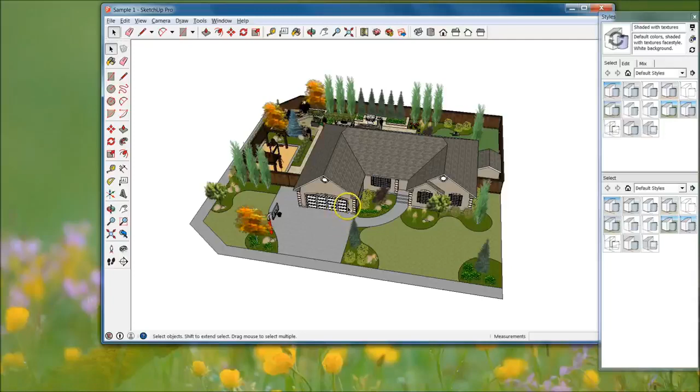I'm super excited about this series because SketchUp and 3D modeling is what I do for a living, so this series is just going to be the best, the greatest that I can put out there.

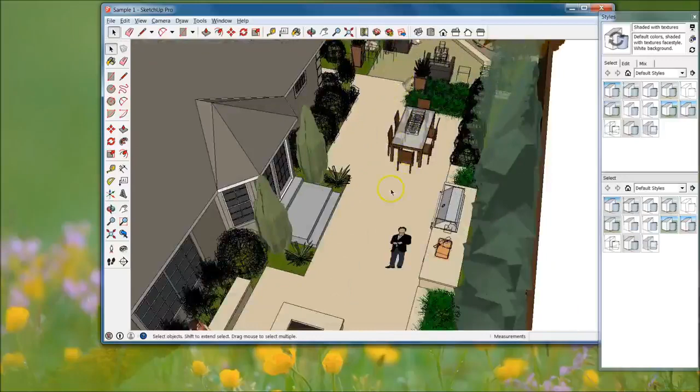First, I'm going to show you some of the things that I've done. These are clients that I've worked for, and I'll show you some examples of what you can do with SketchUp. This is a landscape design, let's zoom in here and pan over a little bit, and just show you some of the things you can build, like tables and chairs, furniture, all this stuff, just the layout.

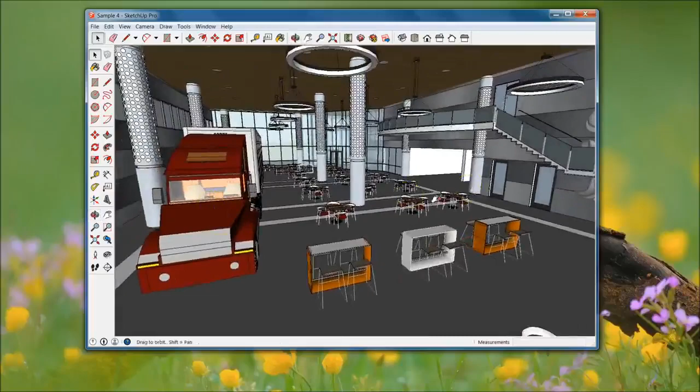I'm going to show you another project, so let's bring that up. This is an interior, actually a project done for CR England and Lisbon Studios. This is their cafeteria area, with a truck inside. Yep, that is Boss. So interior designers will like it a lot.

Also, here's a kitchen design. I'll pull that up. This is for the same Lisbon Studios.

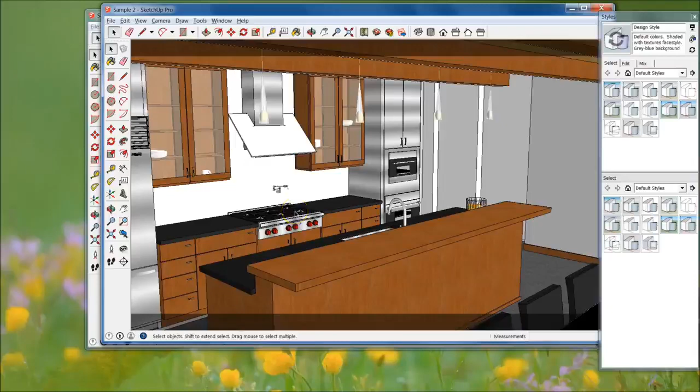SketchUp's great for graphic designers, game designers use it, architects use it, and it's definitely powerful enough to do all of those things. General contractors use it, landscape designers use it. And yes, it could be used for 3D printing and many other things.

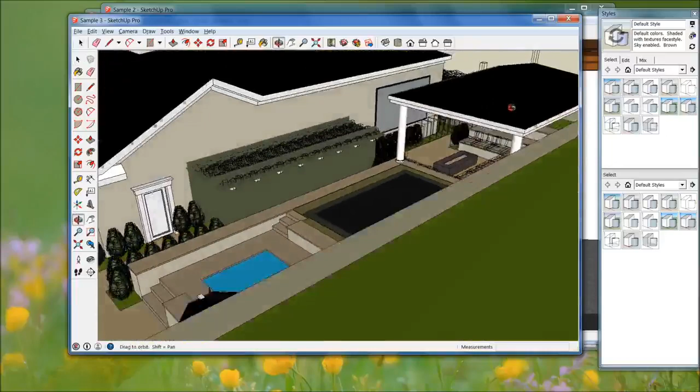So let's show you one last sample. Here's another landscape design right here. There's a pool, zoom in, hot tub, pizza oven. This is actually all built, and I'll maybe throw some pictures up. This is an outdoor movie theater.

Alright, so that's just real quickly. I wanted to show you guys what you can do with SketchUp, pretty much everything, anything to do with design. And now we're going to get started with the sample.

This is going to be a project base, so we're actually going to build a shed. That's the first thing we're going to do. So I'm going to go ahead and exit out of those.

If you already have SketchUp downloaded, let's go ahead and open SketchUp. Where did I put my SketchUp file? Not there, I need to open a new one. There we go. So go ahead and hit start using SketchUp. Choose template - it usually will have you choose a template if this is the first time you've launched it. Just do simple template, feet and inches, and then hit start using SketchUp.

Alright, so you should just have the tools right here on the left hand side. If you don't, you can go up to View, then Toolbars, and just do Getting Started and Large Tool Set. I think that's all we have open right now. And I would do Views as well, go ahead and check that, and then you can just go ahead and hit close.

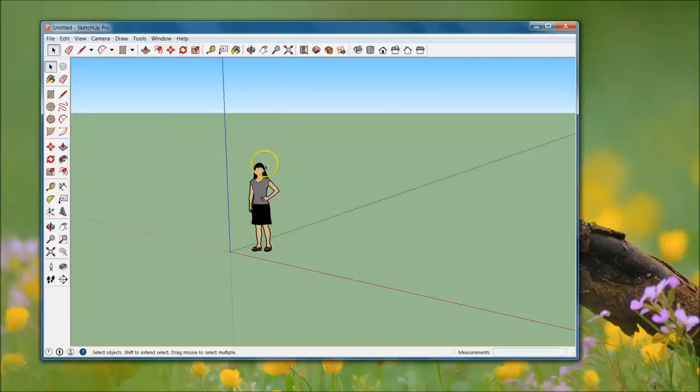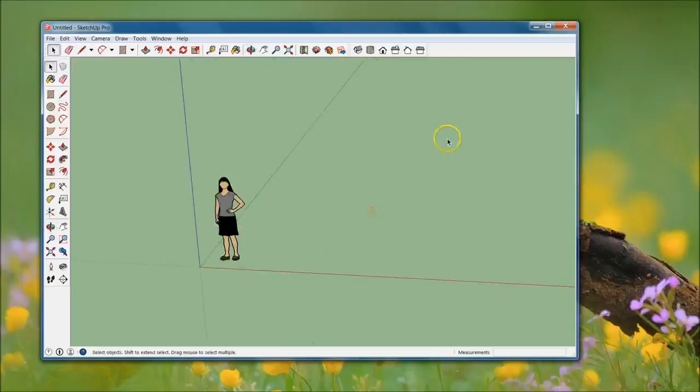Okay, so the first thing we're going to talk about is getting around and navigating. To orbit, if you have a scroll wheel, you just want to click in your scroll wheel on your mouse and then move your mouse around, and that'll allow you to orbit around this young lady right here. Now, if you want to pan, you just hold down Shift and do that same mouse wheel click, and you can pan back and forth, move it around. Orbit is just the mouse wheel, and then you can do that.

Okay, also, if you open this window, you can go top view. Right here, you'll see these tools with the house. You can hit top view, and that'll go above her. You can hit front, it'll go right in front of her, and all the others, left and right.

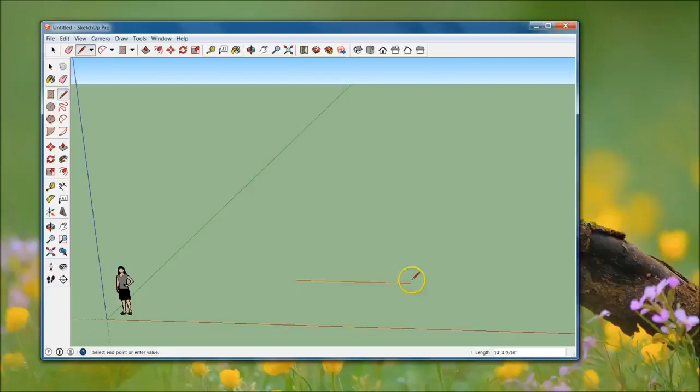So let's come over here. The first tool we're going to go over is just the regular line tool right here. Click that pencil, and we're going to click anywhere in this area. Just click once, and you'll see it's coming up on this red axis right here - that's your x-axis. Now, if you want it to be held - see how it's just kind of free-handing right now? There we go. If you want to draw a straight line, all you need to do is hold down Shift, and it'll lock it to any of these different axes. So I'm holding down Shift, and that's why I can draw it straight.

Now, you can click anywhere after that, and it'll end the line. Now, if you saw down here, you'll see that it went a certain length - it showed the length, 30 feet.

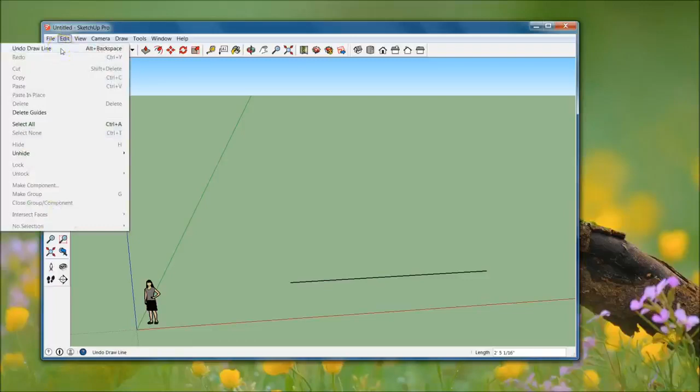Now, if we wanted that to be exactly 30 feet, I'm going to go ahead and hit undo. You can go to edit up here and undo draw line, but I would do either alt backspace, or I use Control Z to do undo.

I'm going to hit escape. If you start drawing a line and you want to get out of it like I just did, you can go ahead and just hit escape, and that'll take you away from that operation. I'm going to hit Control Z real fast, and you can do it too, just to undo that line real quick.

And then go ahead and draw another line, but we're just going to let it drop on the x-axis right there, and then you can take your hand off the mouse, but we're just going to type in 30 feet, and you'll see right down here that 30 came up, right? So if we just type 30, right now that's just 30 inches because the default is to be in inches.

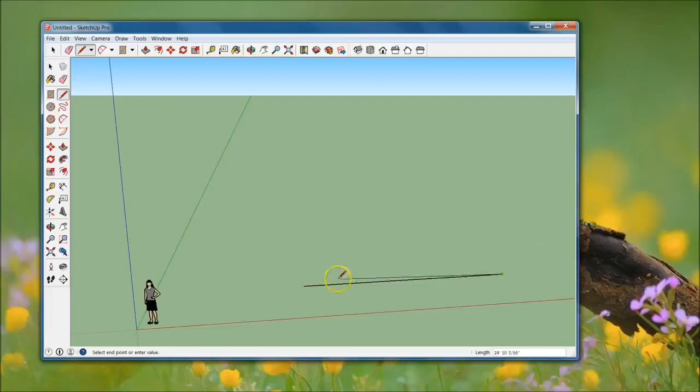So you actually do need to type that comma, or that apostrophe. So go ahead and hit enter, and then you'll see that that line that was created is exactly 30 feet. So let's go back here. I know I'm still embarrassed that I got hung up on the apostrophe word.

Let's go back here, and we're going to do another one, and let's do this one 30 feet as well. Go ahead and hit enter, and then we're going to lock to the x-axis here. And this time we're not going to do 30 feet because what we're going to do is we're just going to hold down shift.

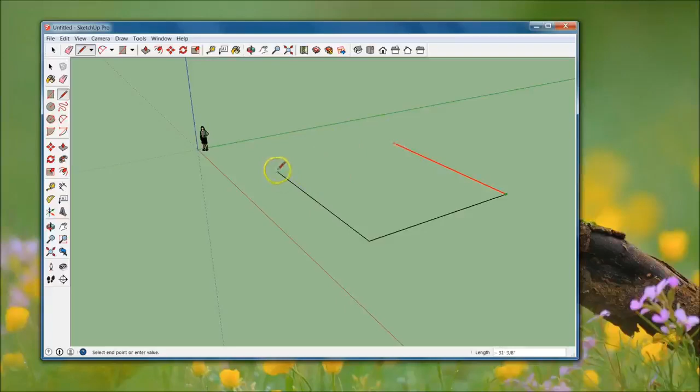We're going to go to the red, and you'll see that there's these little tiny lines, this green line that's going from the pencil edge coming right out of the line. We're going to line that straight up with that edge right there. So it's going to lock to that right there. You see that green dot that comes up? Then we can just click that.

Let me just expand this window all the way up because we can get a fuller view. Now we're going to draw the last line, and this one's actually going to go to this point right here. Now you can hold down shift or not, it doesn't matter. It should just, as soon as you cross over that point, it'll lock to it. And then go ahead and click it and just put it right there. So you'll see that that created this plane around the 4 lines.

We want to bring this up, right? We want to extrude it. And extrude just means to pull away from, and it creates new surfaces to be pulled away, right? So we want to make this a box.

And how we're going to do that is we're going to go right up to here, and we're going to go to the push-pull tool right there. It's that box, it's that little box with the arrow going up, and we're just going to click that right there. And then we're going to come over, and you'll see that you've got the icon of the box.

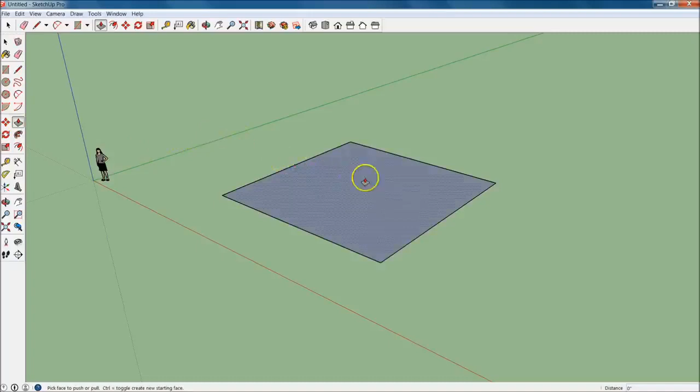We're just going to click, and we're just going to hold down on the left mouse button. We're going to pull up. You'll see there at the bottom right, you've got your distance. We're going to go up 10 feet.

Let's do 10 feet. So we're just going to relieve it, just let go of the mouse button at 10 feet, and then we're going to type in. Now, to do the math, we could just do 120 like that, right? Because that would be really quick, because it's all on the number pad if you have the number pad.

But for the sake of this, we're just going to back up a little bit, and we're just going to do 10 feet. Use the apostrophe and click enter. Now, we want to know that this is exactly 10 feet. Let's say we wanted to check distances.

Well, there's a tool for that, and it's called the measuring tape. So if you come right over here, it looks like that I'm dyslexic. It's actually the tape measure. So we go ahead and we click that right there, and then we can click this edge right here, and we can pull it up, and we can check that. Down at the bottom right, you'll see it says length 10 feet.

Now I cheat sometimes. I actually use just this line tool, the pencil, and I'll come up. Oh, gotta escape out of it. Okay, I'll grab the line tool a lot, and I'll just check that way. But it's actually better form to use the measuring tape. Go like that, and you can create that right there. You can actually click it, and then we'll have this as a point.

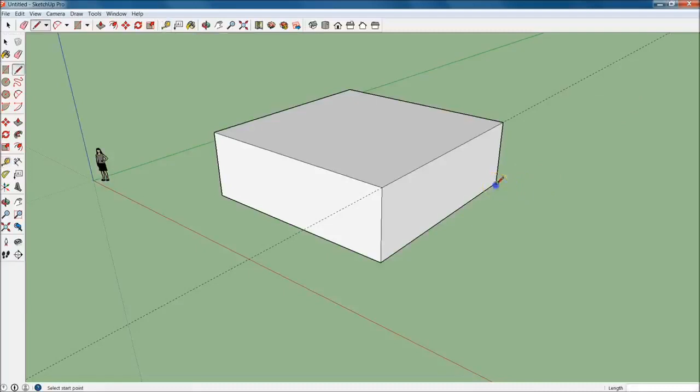So if I were to draw a line out here, I could go up, and if this is way far away and I can't reference this point, I could hold that and know that's 10 feet above, because these reference lines go to infinity.

So let's go ahead and delete that. You just select it with your left mouse button and hit delete right there. Same with this reference line, go ahead and delete that right there.

Alright, so now we have this box here. Now we're going to be building a shed, and how we're going to build it is we're going to start with this rectangle tool right up here, right next to the pencil. Just click that rectangle tool, then click down over here. You can line it up with that if you want. You'll see there's invisible lines being created, but it doesn't matter, just click anywhere.

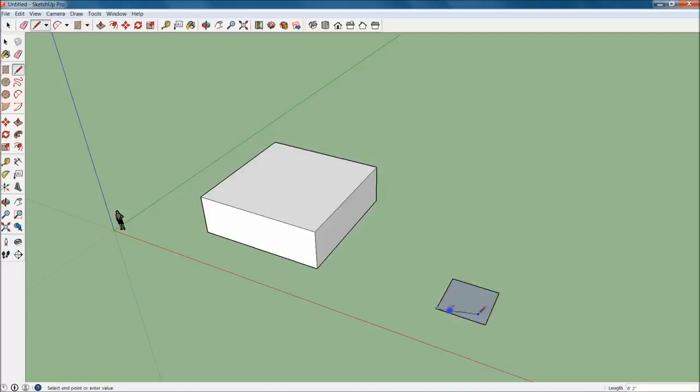You'll see that these dimensions are formatted a little bit differently. Let's pull this out. We're going to make a 10 by 10 shed. It'll take your X dimension and then your Y dimension, with a comma in between. So we'll write 10 feet, comma, 10 feet, and hit enter. You'll see that it's 10 by 10. Double check it - 10 by 10.

Now we're going to make this 10 by 10. We're going to come up - I'm using my shortcut keys. Okay, go back over here and hit your push-pull tool, click that again. We're going to pull that up 10 feet, so click right there, release it, and type 120, because 120 inches is 10 feet. Boom, there you go, 10 feet.

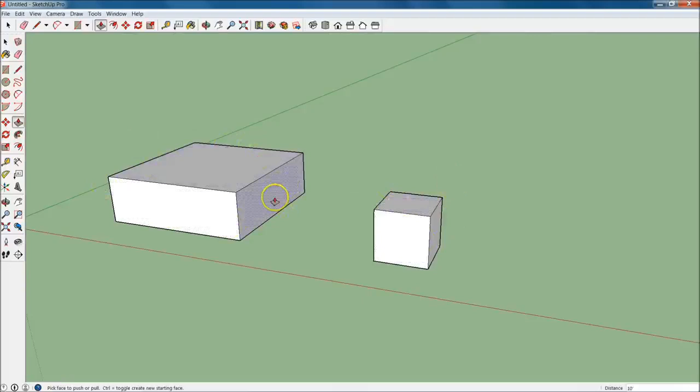Now we want to delete this original box because we no longer need it. To select, we come up here to the arrow tool, click it, and then click the left mouse button - anything fully within that box will be selected. If I just go like this and release, the only thing fully within that box was this line right here - you see it turned blue and was selected.

But if I start from the bottom right and move up, you'll see my box is this dash line - the marquee is this dash line. That'll select everything that any piece of that component or part touches. So if I let go right here, this surface was fully selected even though it wasn't entirely within the marquee. Also these lines coming out weren't fully in the marquee, but still got selected because part of them was in there.

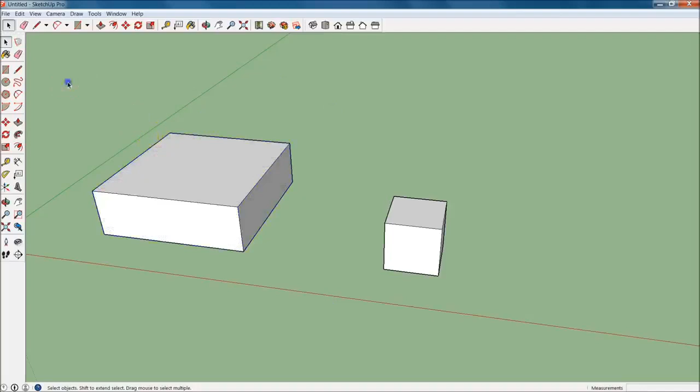So again, if I click anywhere, it'll just deselect. If I come down here like this, it's not going to select anything unless it has the full point or part fully within the marquee - the opposite is true, just a piece of it will select it. So go ahead and select this whole thing and hit delete, and we'll get rid of that.

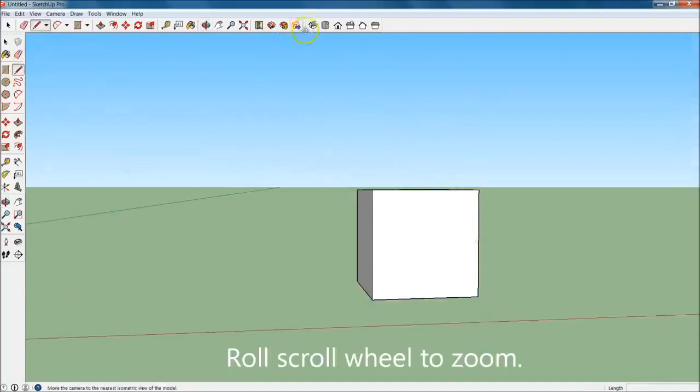Okay, so let's zoom in on this box. This is going to be our shed, and we're just going to draw a line. Come up here and click this pencil right here, and we'll zoom into this face. If we want to look at the face straight on, we can click that right there, and then we'll have a straight-on shot of it. We don't really need to figure this out, but we can determine what we want our pitch to be.

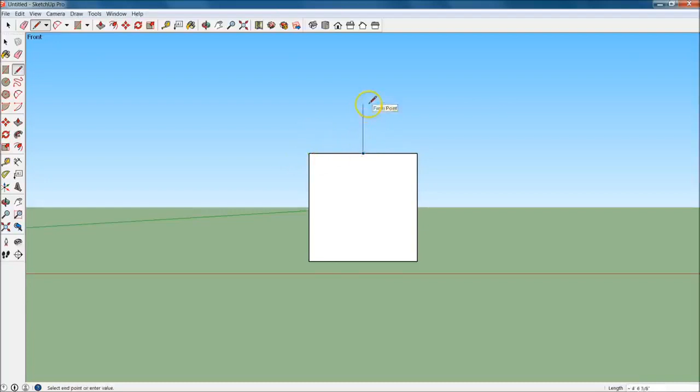How to do that - your pitch is your run and your rise. By run I mean horizontally, and rise is how far it goes up for how far it goes over. So let's set this to, let's just make it 45 - we're going to go up 5 feet, and hit enter. Now we're not going to worry about overhang on this shed right now, we'll worry about that later and how structurally a shed would be built. We're just going for shape right now.

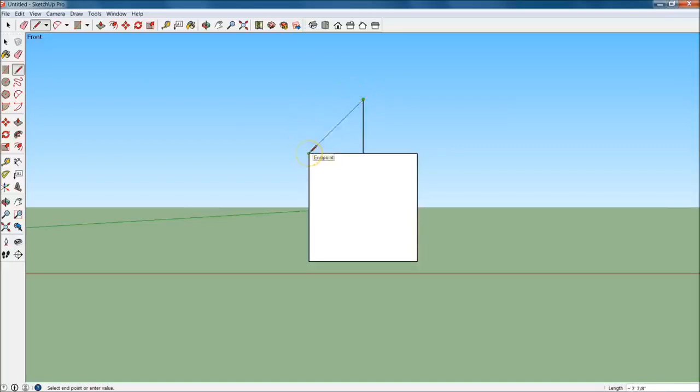Okay, so we've got this line and it's going to continue, so we're going to click that edge right there. And then we've got that 45-degree angle because we have 5 feet going over. For every 5 feet we go over, we go up 5 feet. Now we're going to click this point right here, select right here, and it'll create that new surface.

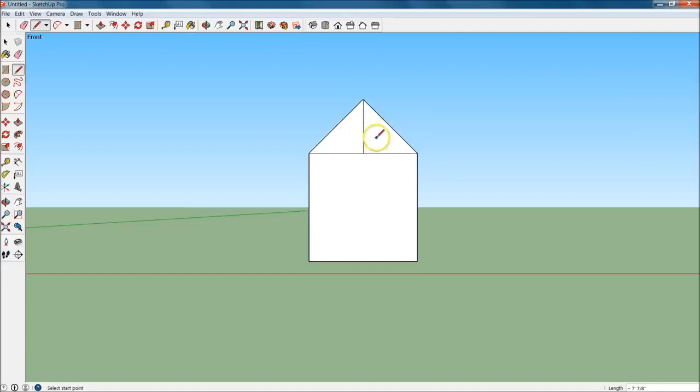Now we want to get rid of this line right here because we only want to push this back once. We don't want to have to, like if I came up here and orbit with the center mouse key or the click wheel, if I were to hit push and then pull it out, I'd have to do both sides. So what we're going to do is eliminate this line right here.

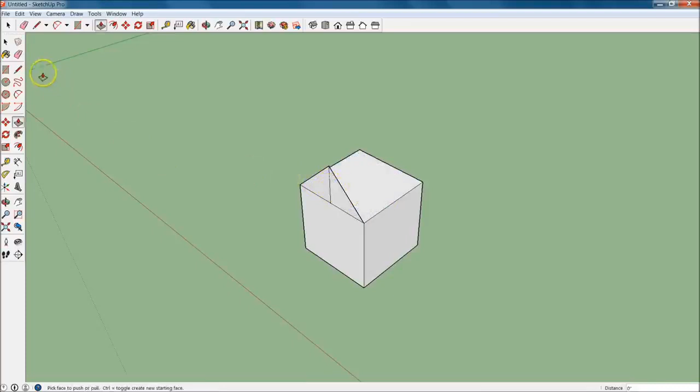And how we do that is with our eraser tool right here. So we just click this eraser tool and come over here, and if we hold down the left mouse button, anything that we go over will get erased. You see that it went blue, right? That means it's going to be erased once I release that left mouse button. So I'm going to release it and it'll take it away.

Now I'm going to undo that real quick with Control Z, or Command Z if you're on Mac. But let's say go ahead and click the arrow or your space bar. If I just wanted to delete this real quick, I could always just select it and then hit delete. But that's more commands because I have to hit the space bar or arrow button, click it, and then hit delete. Versus if I'm using the eraser tool, I just go ahead and hit it.

If I'm using hotkeys, I would hit my E for eraser. Now it's going to be different on yours, so I don't want to talk about hotkeys yet, but I would just click the eraser and swipe over it once. This is useful because sometimes you want to delete more than one thing at a time and not just be individually clicking things. So if I hit undo again and I wanted to erase these 3 lines right here, I just hold down the left key, boom, boom, boom. Takes all 3 of them out.

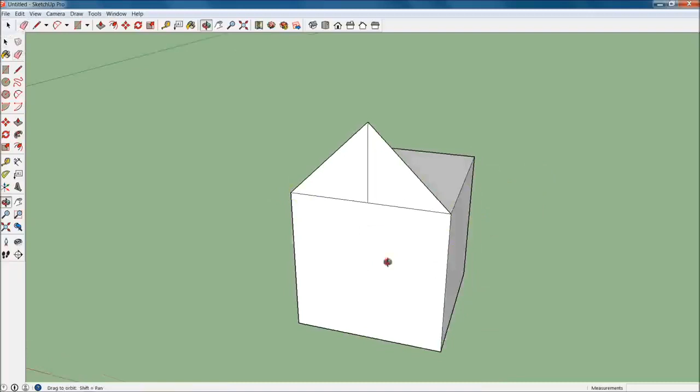So go ahead and hit spacebar right here to go back to that. Now again, you don't have to do that, I'm just showing you that for future reference. Okay, and then I'll do eraser again here, get rid of that line. Okay, now spacebar again, back to the arrow.

What we're going to do here is we're going to push this back to this edge, this triangle. So come up over here, hit the push-pull tool, and we're going to hover over that surface. It'll turn blue once it's ready to be pushed, and then we're going to go ahead and push it all the way to there. Now let's undo this real quick.

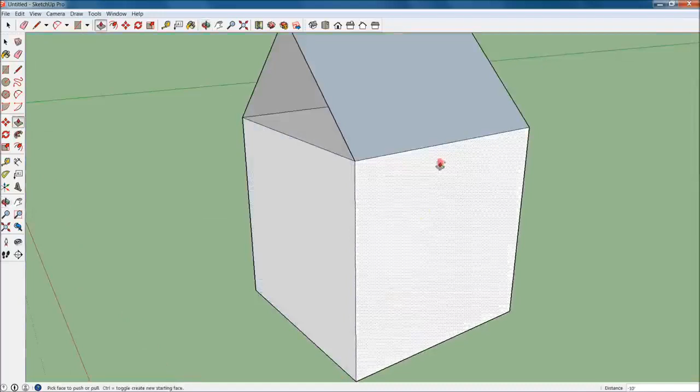You'll see that we've got this light blue surface and it's not really matching. So in SketchUp, there's really no material applied right now, but the default is to have this white with this light blue on the back side. So if I were to click this, well, let's skip that part actually. What we're going to do is undo that real quick with Control Z, and do the push-pull tool right there.

And as we're pulling back like this, you'll see that it goes blue, right? I want you to just hit Control. Did you see that? I just hit Control. Now on the Mac it'll be Command. If not, somebody comment and say it's not, but you're just going to pull it back and then drop it on that point right there.

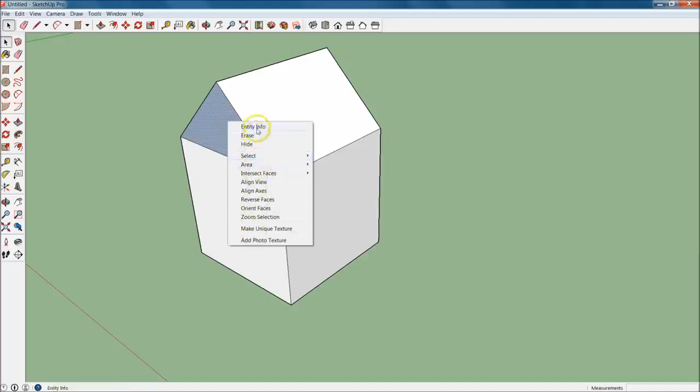Now this side is still blue like this, and we want to switch that, so we're going to press spacebar for arrow. We're going to click on this, and click the right mouse button right there, and you'll see that this drop down menu came up. What we're going to do is reverse faces. Boom, there we go, we get the white right there. That's the one we want. And then we got this side, that side's fine, all good and dandy.

So now what do we want to do with our shed? We want to add a door to this. So how are we going to do that? We're going to go to our rectangle right here.

And we could draw a rectangle like this, but we want our door to be centered. So how are we going to get to our center point? We're going to go ahead and undo that with Control Z, and we can use the measuring tape, and what we can do is come up here and bring this over just like that, and drop it right in the center.

So now we've got our center point. What we're going to do here is decide how tall we want our door. Let's make our door 8 feet. We're going to click right here and bring this up 8 feet. Go ahead and type in 8 feet and hit enter.

Now we want our door to be 3 feet across. We can do the math here - we've got a 10-foot span right here, so if we want this to be 3 feet, the difference is going to be 7 feet, so we'd go 3.5 feet off each edge.

But let's just make it easy on ourselves. We're going to bring this out to 1.5 feet, and that'll give us 42 inches. Boom, right there. Again, I can check with my pencil tool, you'll see that it's 1.6. Did I say 42? Why did I say 42? I did some weird math there - I did 3.5 feet for some reason in my head instead of 1.5 feet.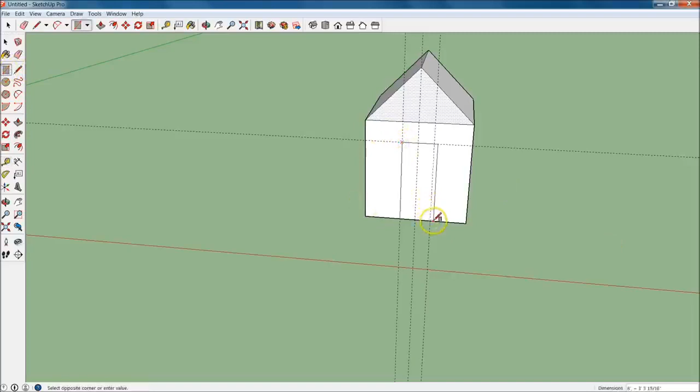Now let's go ahead and select our rectangle tool, bring that down right there, and hit enter. Okay, so now let's erase these lines right here. Remember what we talked about, the eraser tool. Come right up here to the eraser tool, hold down your left mouse button as you scan over these, boom, take them away.

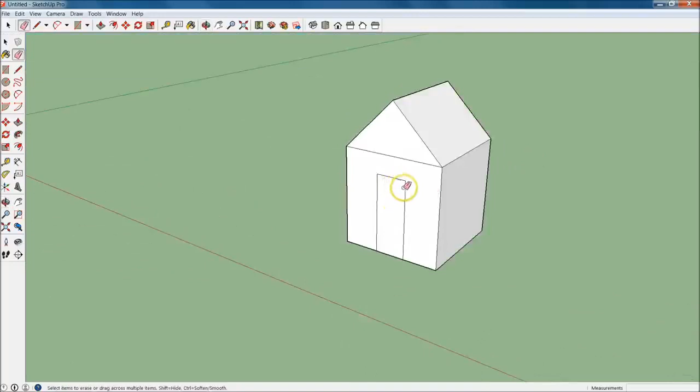And now you're thinking to yourself, okay, I think I made this door a little too high. I actually want it to be 7.5 feet. So what we're going to do now is use the move tool. If we go right over to here, you'll see these 4 arrows - go ahead and click that, that's your move tool. Then we come over here, hover over this line, and drag this down, making sure it's on the blue plane, the Z plane, and then we drop it. After we've already let go of it, that's when we're going to type in the 6 inches. Again, we can do 0.5, or we can just type in 6 and hit enter.

Okay, so let's go ahead and check that with the tape measure. Again, you don't need to, but it's always good practice. So come up, 7.6. Great. Hit escape to get out of that because you don't want to put that down.

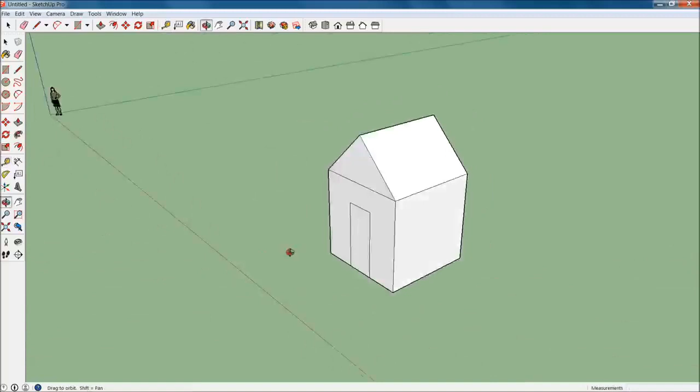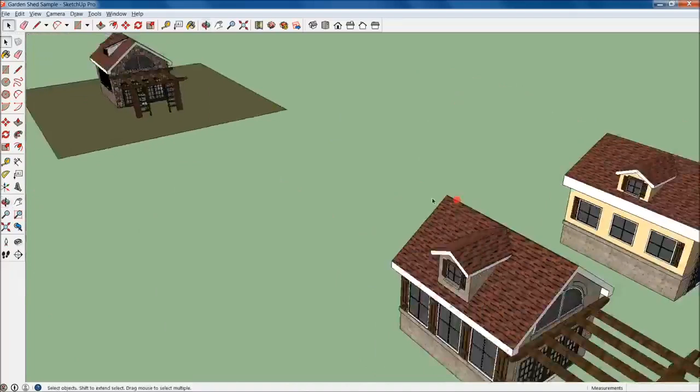Alright, so we've got this start to our shed. We're getting about 20 minutes in, getting close to 20 minutes. So real quickly, I'm just going to show you where this is going to lead to. We're going to get something like this - we're going to be building this garden shed right here. Not exactly, we're going to be doing our own versions. You see over here, I've got some other versions. So we'll divert, but this is the amount of detail that we're going to move up to in the following days, and we're going to get windows in, we're going to go over a lot more tools.

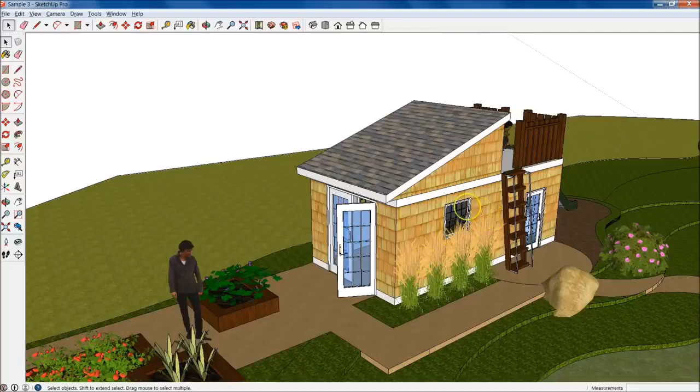And here's another sample of another shed that we will do. Again, we will do different sheds like this, but by the time we get there, it'll be really cool to see all the different styles and different materials that you guys add to your sheds as well. So maybe I'll put a link down below or an email that you can send those once your shed's completely done, and then we can all see it or share it.

But for now, we're going to stop here because we're getting a little long. So go into day 2, and we will continue along with our shed.